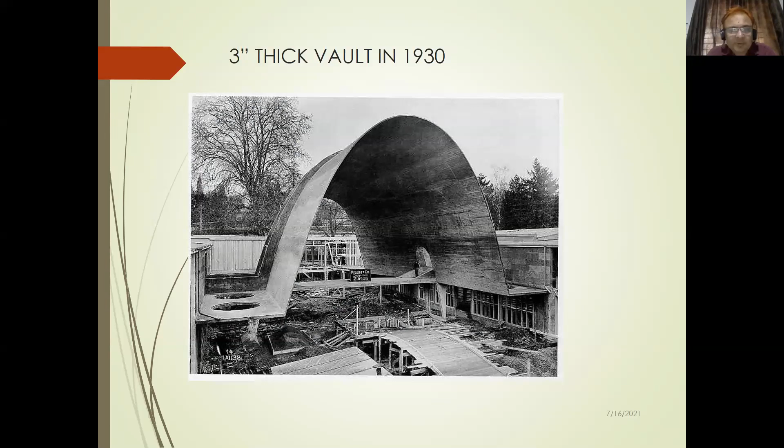Ultimately, why are structures built earlier standing intact and giving service, but recently constructed buildings showing distress? What is the reason? This big question mark should be in your mind, and then you can find the solution. See, this is a 1750 old structure, built in 1750, so we can calculate the durability. This is 1930, when concrete was initially invented. So many people were very careful about concreting. It's a new material, so they were much caring about quality, and small points were taken care of. With this particular small point, they built a 3-inch thick vault, and it is still intact.

These are good construction examples. This is also a good example of RCC. And now this is the condition of the apartment at Godol Road, you can see. Ultimately, the durability of the structure should vary. If you build a temple, it should last more than 800 to 1000 years, even 100 years, 1000 year, 600, 700, 800, 900. We can see intact temples in south India, very precious in our country.

Yes, as per Vastu Shastra, the temple should be let's say 800 to 1200 years old, and it should be intact. If there is a hospital, it should last 150, 200 years. Spacious structures like dams, bridges should be 250 years, 150 years. Residential buildings should be minimum 80 to 100 years. Durability should be there; it should give service up to 80 to 100 years minimum.

We can see structures in our core cities of Ahmedabad or Surat or any city which are more than 100 years old, still functioning, with people using and occupying them. Recently we inaugurated a bridge adjacent to the Golden Bridge, and we are now going to retire the Golden Bridge. The Golden Bridge was constructed in 1881. It completed 100 years in 1981.

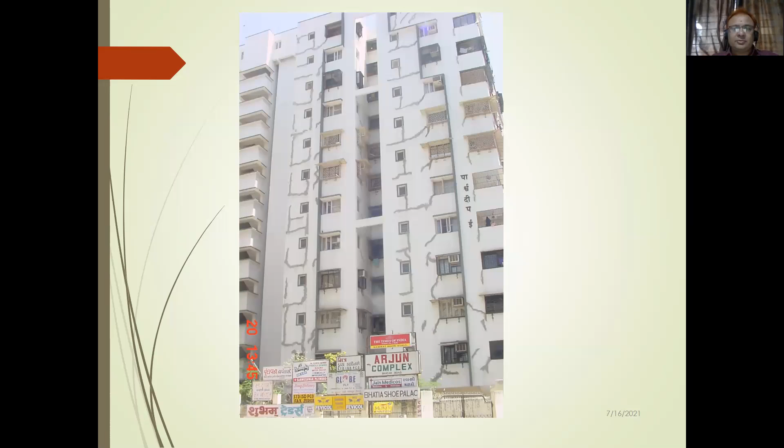I think most of us are technical persons and civil engineers, so there is no need to explain the figures or photographs. The culprit here is the rainwater pipe. In most buildings, the rainwater pipe is near the corner column, because this is the terrace and the rainwater pipe runs in the corner, adjacent to that particular column. If there is damage or any leakage from the joints of this rainwater pipe, this column may be affected and corrosion will start and progress.

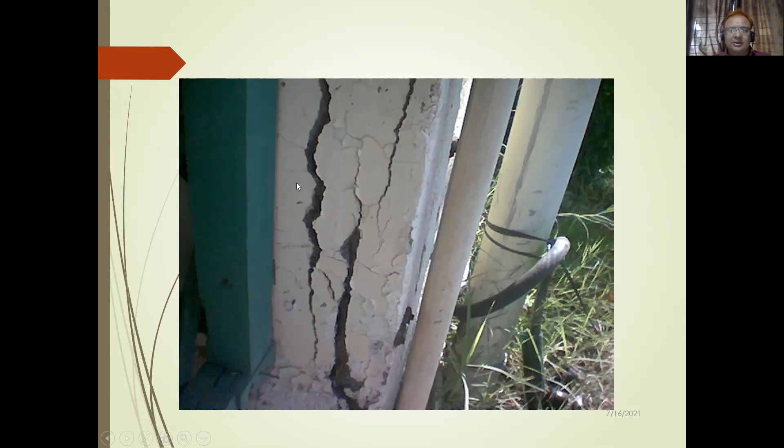There is dampness visible from the exterior wall, and we will discuss the reasons for this whole scenario. This is also a corner where the column covering is gone. Not only plaster, but reinforcement is exposed here on the terrace floor slab.

When water accumulates and stagnates on the terrace, it seeps through the slab and corrodes the reinforcement. When reinforcement corrodes, its volume increases up to 6 times, and then the cover concrete of the slab and the plaster both delaminate from it, and it becomes harmful.

In our PWD Awas near Bahumari, a slab fell in a dining hall and there was one fatality.

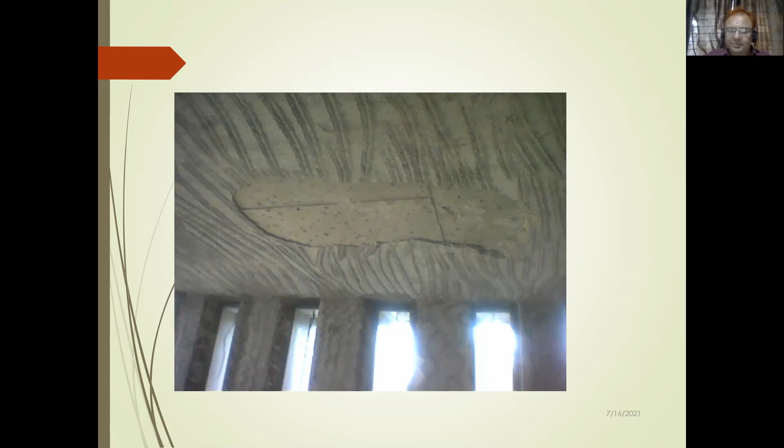Instead, just use a plastic sheet, and then remove the plastic sheet after removing the formwork, and it will be easy for plastering afterward. This is what I wanted to say.

Corroding of steel, then cover, and then plaster. This steel, this cover portion of the slab, and this is the plaster.

So step by step, I will discuss how we build our buildings, covering every aspect from the foundation, every area and every stage of the structure, and the care that should be taken to erect a durable structure.

First, we start with excavation and setting out of the building. The necessity of site visit and soil exploration is very important, because geotech engineering is, in my point of view, a more neglected area nowadays.

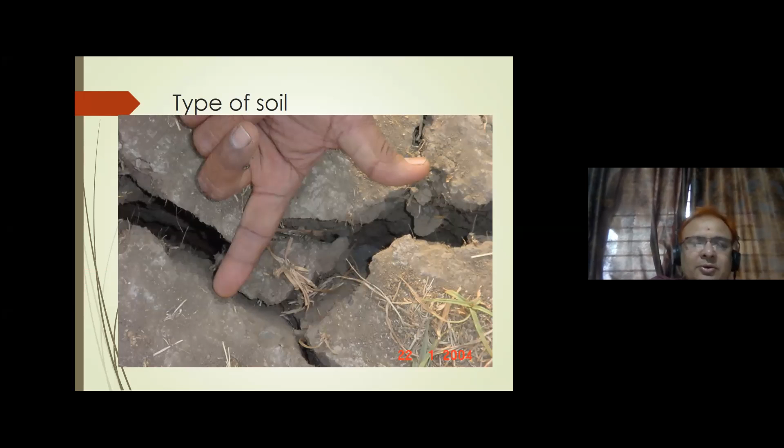We have to check the type of soil, which type of soil is there nearby your site or at your site, whether it is black cotton soil or yellow soil. And you have to take care of the subsoil water table also. Because if there is no monsoon, the subsoil water table will obviously be low. But when the rainwater comes, the water table will be up.

When you are going for the site visit or you want to buy the plot, check it out. The plot should be at an upper level from the road. The highest level of the plot should be higher than the road. That is preferable. But the plot which is 1, 2 or 3 meters below the existing road, what to do? The person who wants to sell the plot refills the soil on the plot so the level is higher than the existing road.

And if you are not aware and you start excavating or you design the foundation or that particular footing, you will be in trouble because there is refilled soil. So first of all, check on your site whether the soil is natural or refilled.

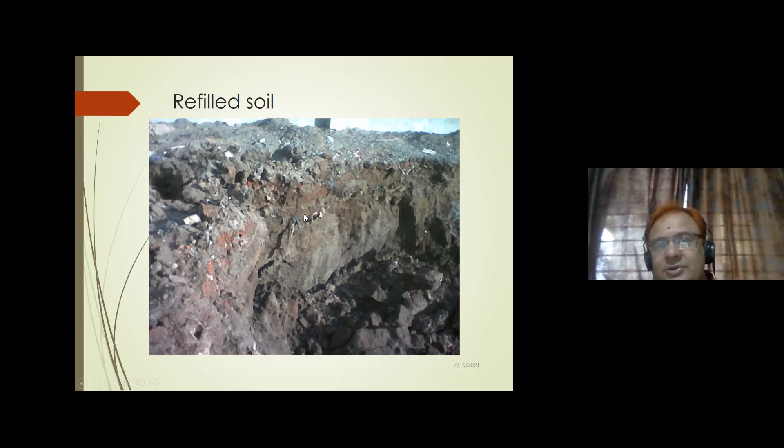Local poor pockets may be there during your excavation of the pit. The scenario is that you don't know what a local poor pocket is, but you have to take care about the adjacent properties and uses of the people in nearby premises. I am giving the pictures also.

Can anyone answer? Anything wrong in this picture? Can anyone answer? Anything wrong in this picture? Because the interaction can boost my energy to deliver the lecture and tell me at what wavelength I have to deliver.

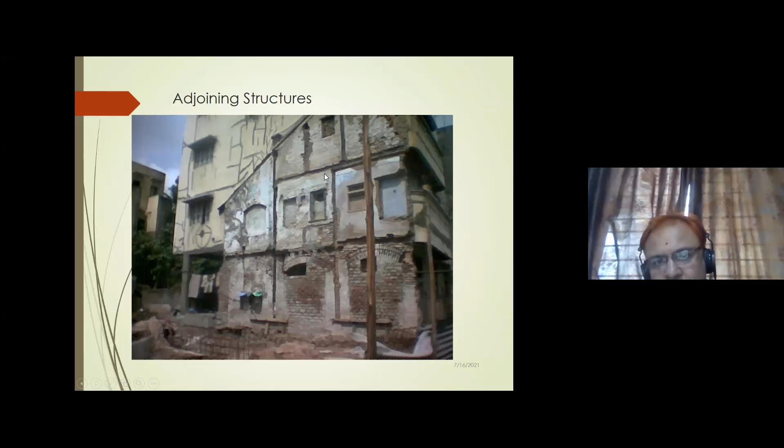So here is the excavation for a footing trench. Storing this particular soil near the footing is a wrong practice. You have to throw away this particular soil so it cannot go back into your trench, and fatal accidents will be prevented. So this is wrong. If there is rain, this soil nearby will fill your excavated trench again.

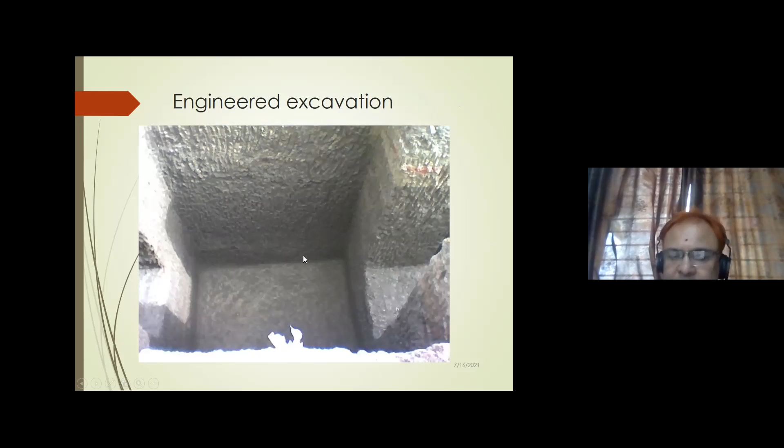This is also permanent. But if you are going for such type of arrangement, take care this concreting should be intact enough. Otherwise, it will move horizontally or vertically. Then your center line or marking will be disturbed, and your column, trench and footing center will be gone. So you have to take care every time. When you come to the site the next day, check the center line and then start the work.

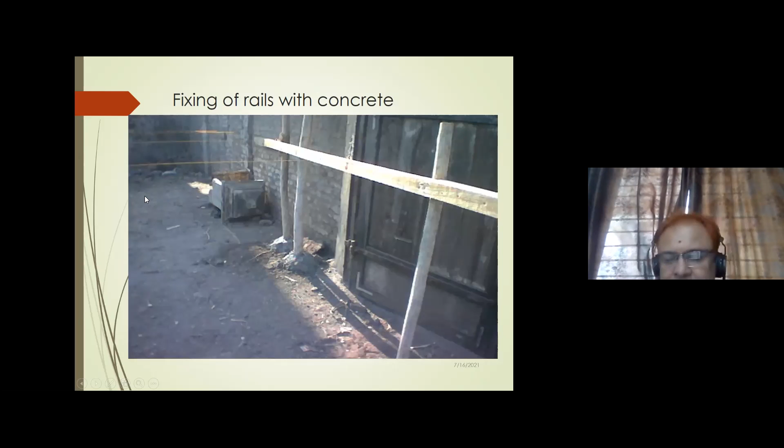Here it is. In so many cases I found that it is on this wall, that is fine. But if we are making an arrangement like this, it may be disturbed by someone or some animals. So we are victims of this center line being disturbed.

Don't excavate the entire area. If you go one by one footing, it will be good because you find the consolidated soil near this footing, and if you are going for a masonry structure, you know the soft story effect will be here in this particular entire area we are excavating. If there is a basement, that is fine, but we are refilling this soil, so don't go for the whole entire area excavated by the JCB. Just one by one, take the trenches, excavate the pits, and fill again.

This type of support, what I say, you have to support horizontally when you're excavating any structure in a Gamtal area or in a city area. Otherwise, the nearby adjacent property may tilt.

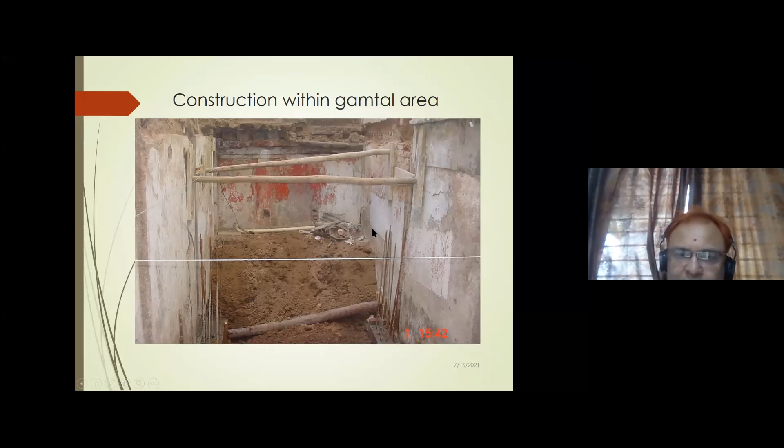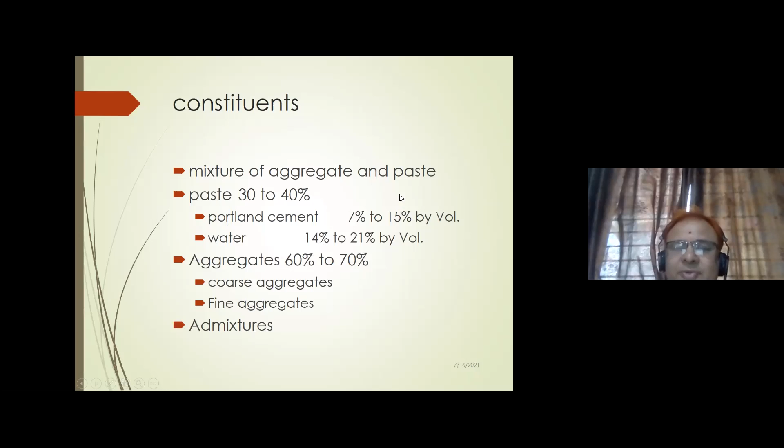Then we know that the material should be of good quality, but up to which extent are we taking care? Basically, concrete is a man-made stone. What we know is cement, sand, coarse aggregate, and then ultimately concrete is there. This is the ideal mixture of aggregate and paste. Paste should be 30 to 40%. Portland cement 7 to 15% by volume. Water should be 14 to 21%. The filler material, aggregate, 60 to 70%, coarse and fine, and then admixture. This is the ideal of concrete.

We all know that. Then, sorry. Cement should be a dry powder of very fine particles, these are the ideal points. It forms a paste when mixed with water, the chemical reaction hydration happens, ultimately glue is there, then the paste coats all the aggregate together by this glue. It hardens and forms a solid mass after setting. This is the ideal scenario.

Water is needed for two purposes, chemical reaction and workability. Only 1/3 of the water is needed for the chemical reaction. Then the remaining water remains as pores and holes. So for workability we can concentrate on this area, reduce the water and increase the workability, and then the extra water remaining as pores and holes can be minimized.

Excess water, if we are going for more water than the design, is good for preventing plastic shrinkage cracking and for workability, but bad for permeability, strength and durability. We are not getting enough strength if water is excess.

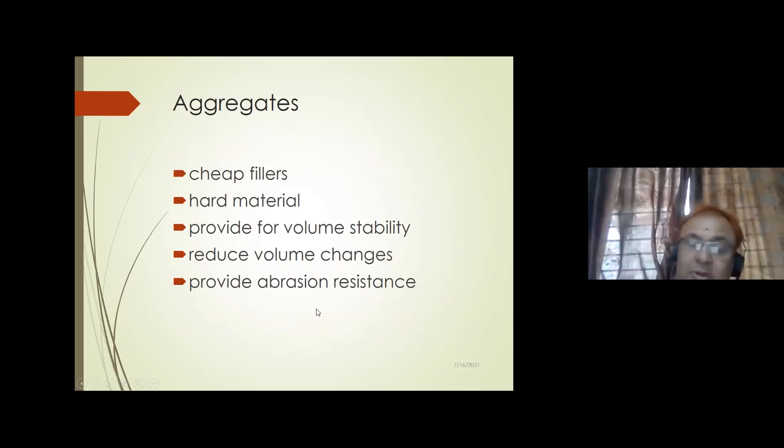Aggregate is the cheap filler, a hard material, providing volume stability, reducing volume changes and providing abrasion resistance in the case of pavements and roads or godown flooring also.

Okay, now the cement. 1, 2, 3, 4, 5, 6, 7, 8, 9, and 10. Don't stack cement more than 10 bags high in the godown. Otherwise, the bottom cement is under pressure, and within a few days it will set.

When we are using the cement, check company, grade, date of manufacture, field test, weight, and fineness. This is very important. If someone says that your cement is not in good condition, or this is duplicate cement, or a collapse happened due to your negligence with the cement, you can mail the cement company with the grade, date of manufacture and field test, and that cement company will provide you a certificate of what they tested in their lab for your batch of cement.

You can give the batch number at your site. Yes, sir. Dear sir, this is the cement I purchased from so and so shop, and this is the batch number of the cement.

There are some problems with the site, and we want to know the exact scenario of your cement test. So they will send you a test of your cement, a fineness test, and you can say soundness test. All the results they have, they can send us, and then we can give it as a proof to the client in an arbitration. Then you can know the cement is good enough.

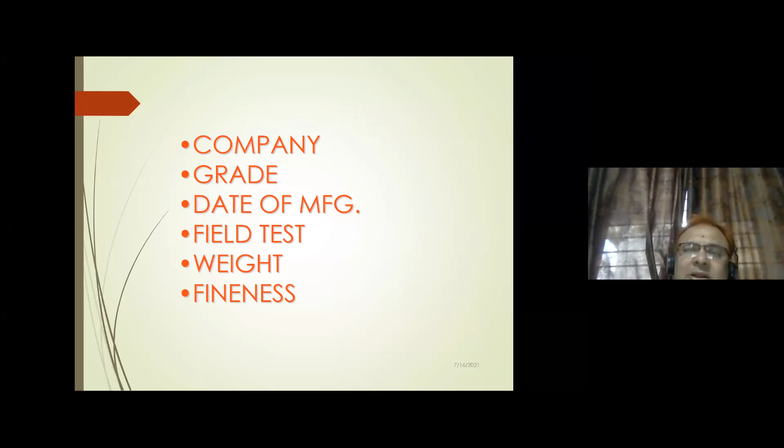Otherwise, anyone can say that you are using a duplicate cement, or the cement is old cement. So you can give a date of manufacturing and give a result of the cement. You can ask any cement company by mail, and they can send you a result.

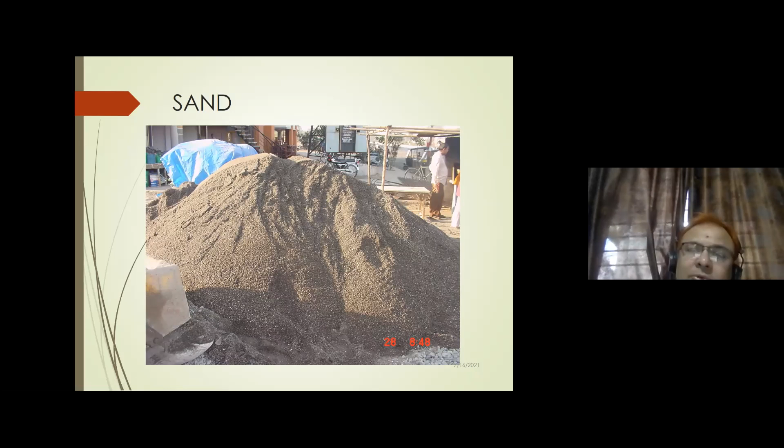Sand. During monsoon we have to take care about the sand. This is the sand with other unwanted stuff in it. Because during monsoon, what happens? The stream of the river is fast. So the person who is accumulating the sand is not able to fix their pump at the center of the river. So what they do is come to the bank of the river, and whatever sand with the unnecessary stuff, they will fill in the truck and supply to you at your site.

The mud also will come with your sand. You should be vigilant enough at your site, check the particular type of sand and tell them you have to supply sand which is in a storage place, because they store the sand also before monsoon. And don't use such type of sand, because the contractor will not say anything to you, because with the mud the cement content will be less. With very less cement they will make a mortar with the help of this mud. So don't use this type of sand at our site.

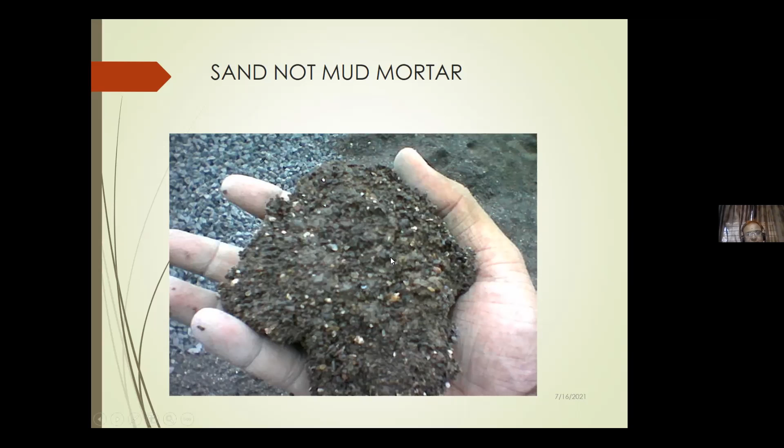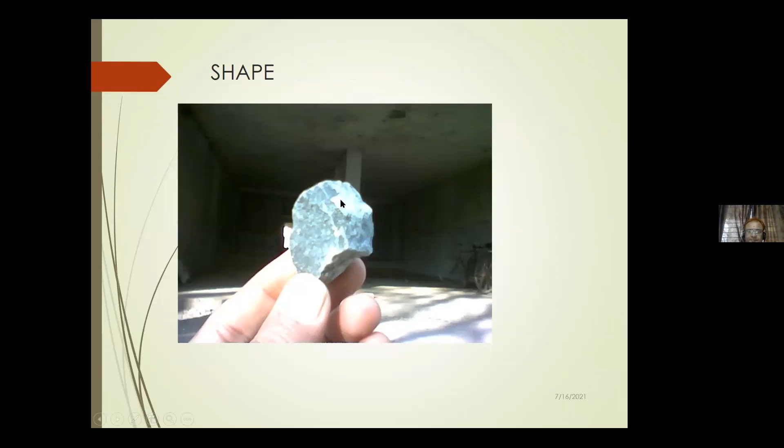This is the water cement ratio, how we check it out. If cement is more and water is less, this is one scenario. If water content is more, that scenario is different. When we increase the water content, the strength will be decreased. But we have to balance the water cement ratio and strength according to the requirement of the site and how workable concrete is needed at our site. In mass concreting there is not much workability needed. For pump concrete, we need good workability. Accordingly, we can decide and make a concrete.

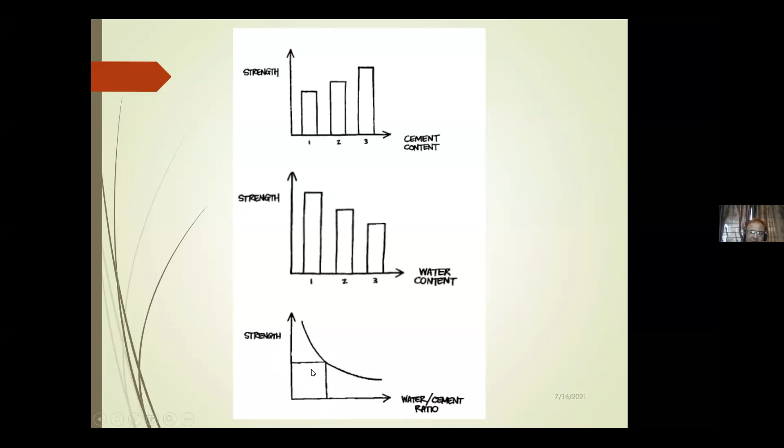But now, thermomechanically treated bar is available in the market. But how to check whether this particular bar is TMT or not? From day one through my whole journey, diploma, BE, masters in structure and PhD, all from SVNIT, I did not find a single chapter or line in any book on how to check the thermomechanically treated bar at our site. So I will show you, because we use this steel as a ductile material. If it is not proper, our building may collapse during a tremor or under lateral load.

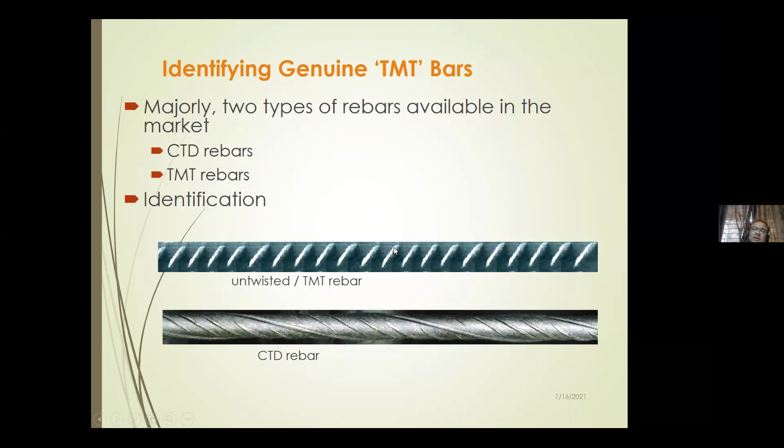Just merely relying on the word TMT, you cannot rely on TMT or thermomechanically treated, don't rely on it. It's just misapprehension to the customer and misuse by the manufacturer. They are misusing this particular word and supply any type of steel at our site. So the technical definition is what?

Must comply with a set of chemical, physical and mechanical properties of product manufactured by means of, see, again I am telling, manufactured by means of heating, they have to heat, then draw it, then quenching and tempering. These four processes should be done in a proper manner. Otherwise, we cannot produce the thermomechanically treated bar.

This heating, drawing, and tempering, these are fine. But there is a problem in the quenching. Anyone know what is quenching? Okay. I will show you what is quenching. If some video is appropriate, I want to show you what is quenching, because you are not replying, so that's why I'm putting such exercises. Quenching means when you are heating the steel and

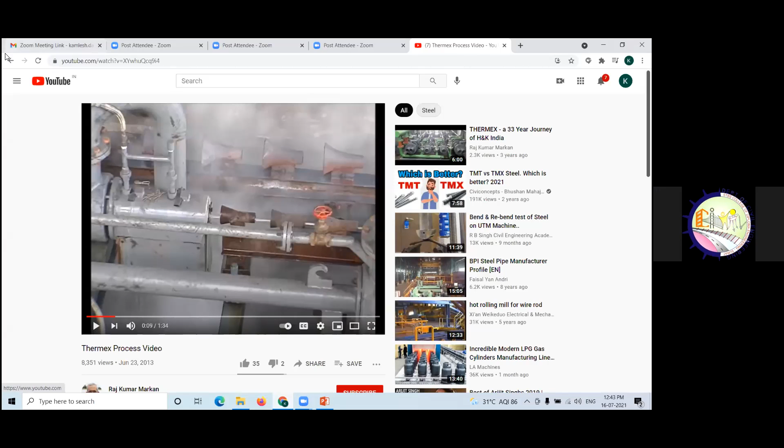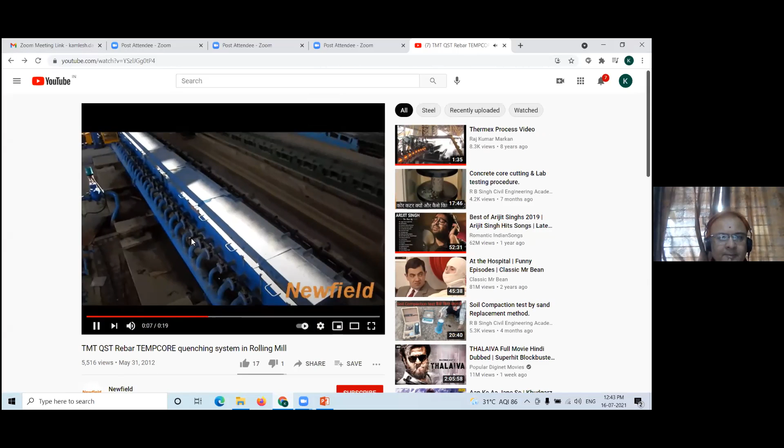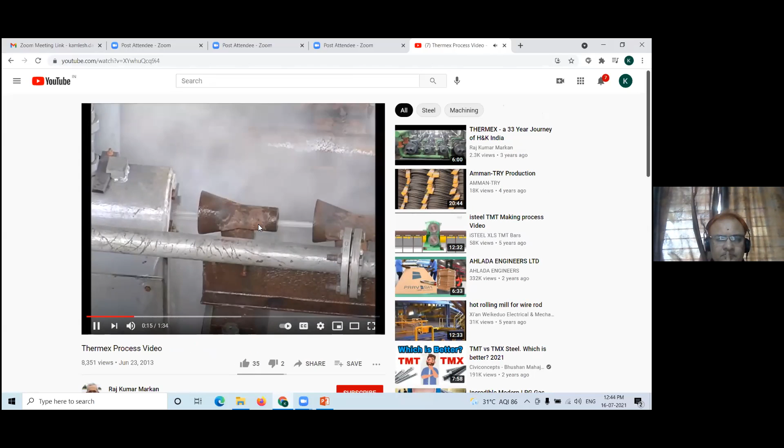This is the video I am telling about. This is the quenching box. And on the side you will see water falling. This is the water they are sprinkling on this particular hot bar. See the water. This you can see here.

I think now you are able to see the video, no? Yes. Hello. Yes. Okay.

Okay. This is the process of quenching. Ultimately, they heat the bar.

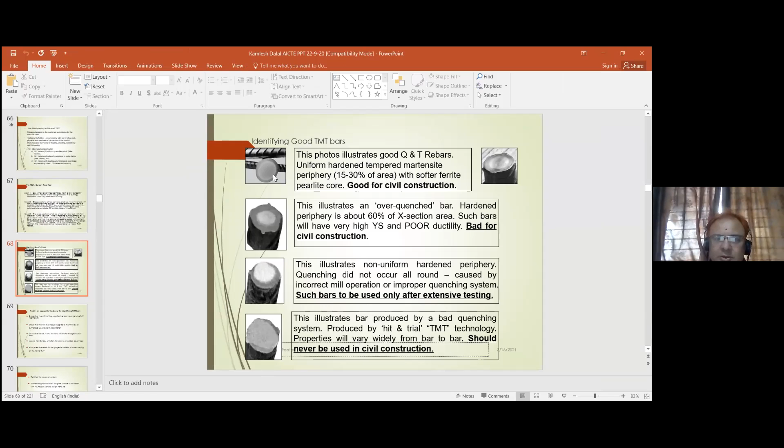Okay. So what is the actual process? So many engineers don't know the actual process of TMT bar. This is the cross section of the bar. As per our video, you can see the uniform hardened tempered martensite periphery. It should be 15 to 30% of the area, and in between, the softer ferrite-pearlite core; it is good for civil construction.

If bar benders are bending stirrups, it will crack because this type of over-quenched bar has a more hardened periphery and less soft core. So it will crack, and we cannot get enough ductility in such wrongly quenched bar. So these are the exact scenarios of quenching and thermomechanically treated bar. This is a perfectly treated bar.

This is over-quenched. This illustrates a non-uniform hardened periphery; quenching did not occur all around. Some manufacturers are not going for quenching. As we see in the video, they just dip the bar in the water tank and remove it. So a perfect TMT bar will not be manufactured in that company. These will be harmful for our site.

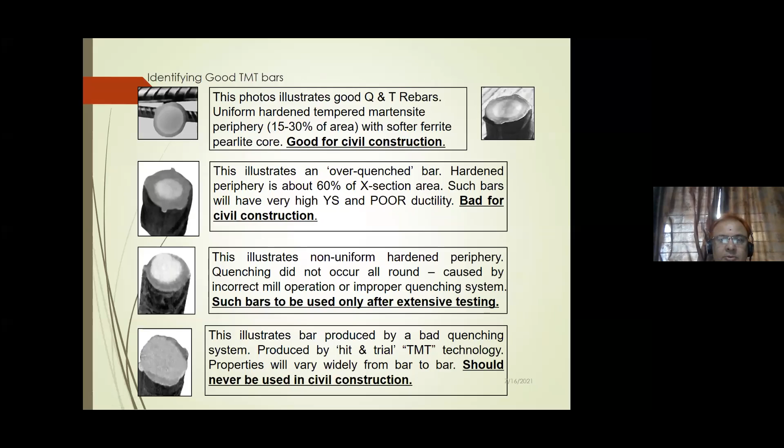This is the exact 15 to 30% martensite area, and the rest is the soft core. So how to know that this is perfect TMT or not? This is very important. So we are going for the cursory test. Just a moment, I am not able to change this slide. This is a cursory field test. We randomly cut a small length of test sample from what the supplier actually gives us at the site, from a few randomly selected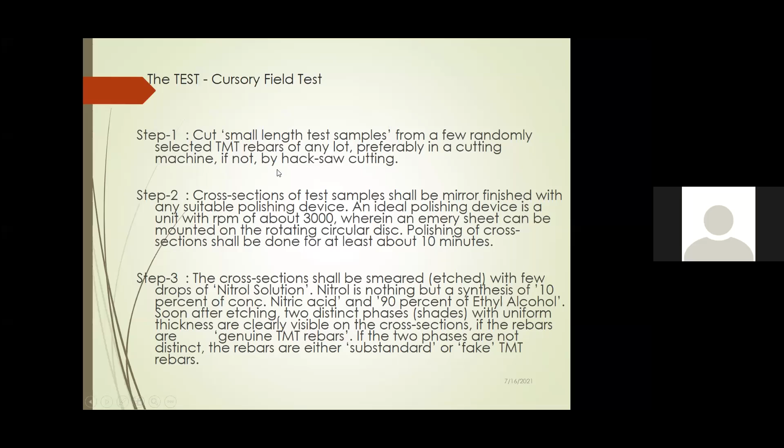Hello, sir. Sir, you are not audible. Hello. Sir, am I audible? Hello. Yes, madam. Kamlesh, sir. Sir, are you getting my voice or not? Hello, sir, you are not audible.

Hello? Yes, sir. Hello. Yes, sir. Due to some error, I am not able to... Can you see my screen? No, sir, it's not visible. Okay, I will share again. Yes, now it's visible, sir. Okay, due to some connection problem, it may be there. No problem, sir. Please continue.

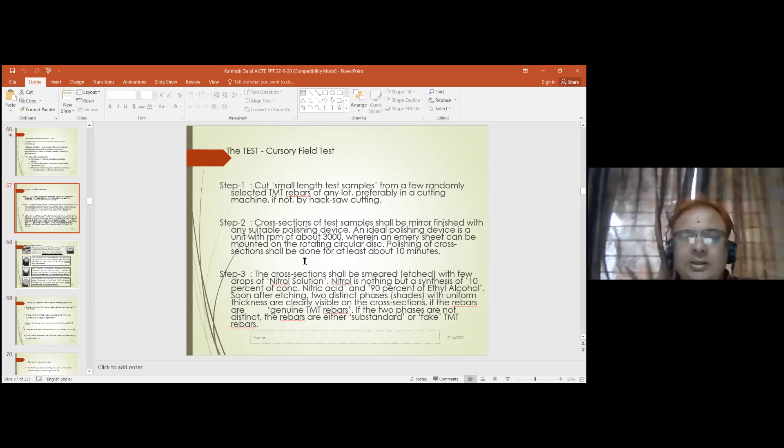So, we have to go for the procedure actually. I think we start the procedure again. Cut the small length of test sample from the randomly selected bar. Then with 3000 RPM, we have to polish with the emery, and then the main point, the cross section shall be smeared or etched with a few drops of nital. Nital means what? It is nothing but the synthesis of 10% of concentrated nitric acid and 90% of ethyl alcohol.

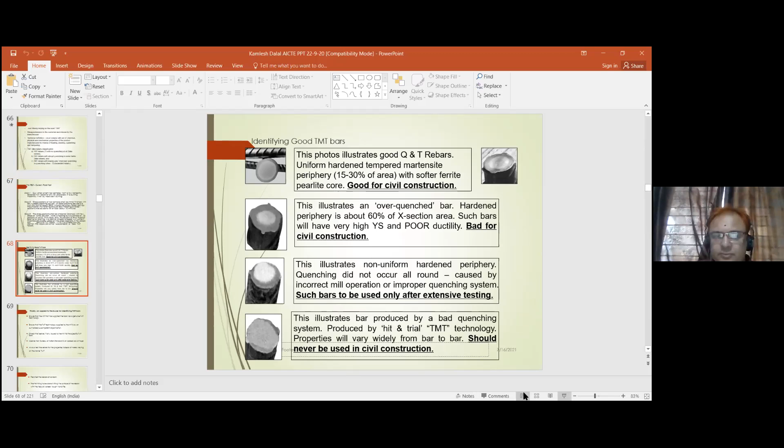Because nowadays very good standard companies are there, but we have to check it out randomly, so we are assured about this bar. We check the sand, then coarse aggregate, then cement, and this bar also. Okay, this is the cursory test what we discussed. I am not taking much time.

Now, the construction equipment. These are also playing a very important role. These are the volume-based mixing. You all know that as civil engineers. The weight batch mixer machines are more precise and more preferable, but in 60 to 70% of our construction industry, such practice is going on till date. These are mixer machines.

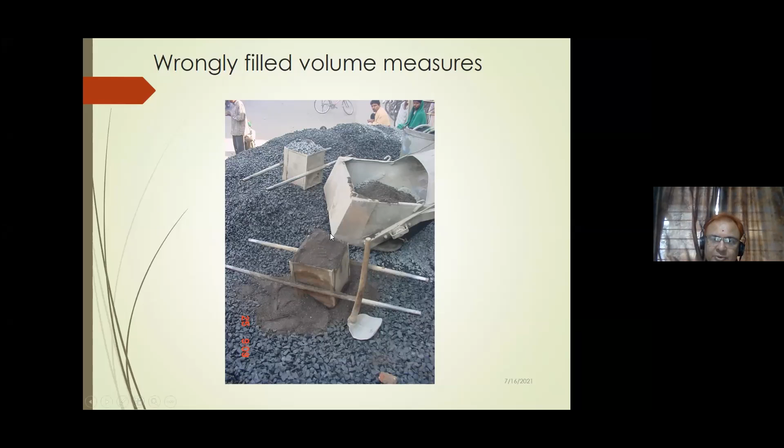And now, wrongly filled volume measures. You can see one bag cement's volume is here by this line, and these are the excess coarse aggregate and excess fine aggregate. So cement content will be less when you are using such type of practice. See, we have to take care if we are teachers or professors. What I suggest to all, the future of the civil industry should not be like this. We have to train and educate our students. This practice should be eliminated from the site.

And by volume, they are using this type of gamela also. Some are using big and some using small gamela. If this is a small gamela, one bag of cement will cover four gamelas. Per bag of cement, four numbers of gamela. But when you are measuring cement, this gamela is there; when you are measuring aggregate, this one will be there. So the cement content is again less, our concrete will suffer, and our ultimate structure will be less durable.

Sometimes on the site, due to congestion of the steel in a junction of column, beam, and cantilever beam, there is extra steel in the cantilever area. We know that when designing the structure, there is an extra bar on the cantilever side on top. Then bent up bars from the beam will also go on top of the column, and the existing vertical column bars are also in that particular junction. So these junctions are very congested with steel, and with 0.4, 0.3 or 0.35 water cement ratio concrete, it is not possible to cast the concrete in that particular junction.

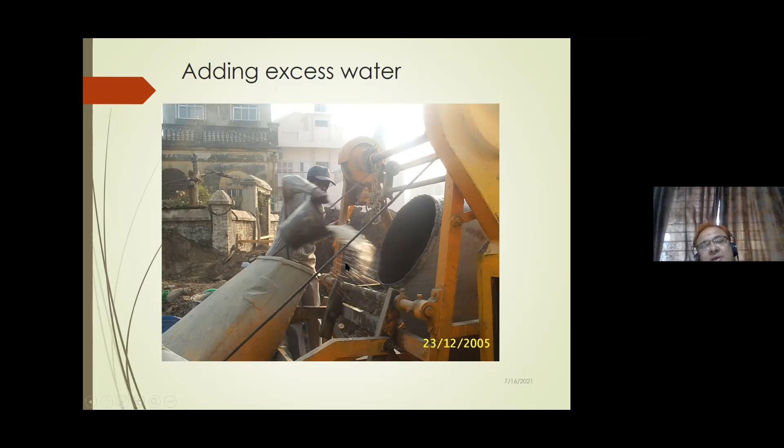So the person who is casting the slab makes a whistle, and this whistle is heard by the waterman, and he gives this type of sign for the water. He will add excess water on the site, and our mix design of 0.35 or 0.45 will go to 0.5, 0.6, and 0.7 water cement ratio by this gesture. So our concrete will be gone and our mix design will be vanished.

Then what I said, use the modern concrete mixer machine. This will be advisable on every site, but it is not always possible. So we have to take care of what we told about all the materials, and the volume-based mixtures should be taken care of, filled level with the surface only.

When we are using vibrator, go in quickly, out slowly. Then count 1, 2, 3, 4, 5, such type of practice will be there, but the poker must be long enough to go into the bottom layer.

Never touch the poker with the formwork. The formwork should not be touched.

And never touch the reinforcement, because when we cast this 10-meter slab, the reinforcement in the slab will set within 30 minutes as per our cement setting time. If we touch the reinforcement while vibrating, the bonding between the concrete and the reinforcement will be lost.

So don't touch the formwork and don't touch the reinforcement, and never spread the concrete with the poker on the reinforcement, as it may collapse the formwork.

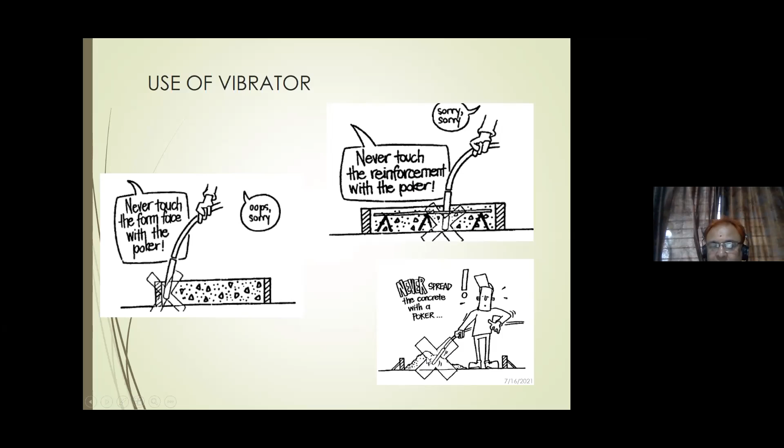And for footing, when we construct a footing, go for dewatering, don't skip it. Otherwise what they do is pour dry concrete in the footing while water is already available in the footing. Don't skip dewatering before pouring the concrete.

And provide a proper cover as per the IS code. Minimum 50 mm cover should be available in a footing. So provide a proper cover in the footing, otherwise it will corrode the reinforcement.

This is the slope of a footing, this is also a good quality. Don't use plastic bags behind the footing.

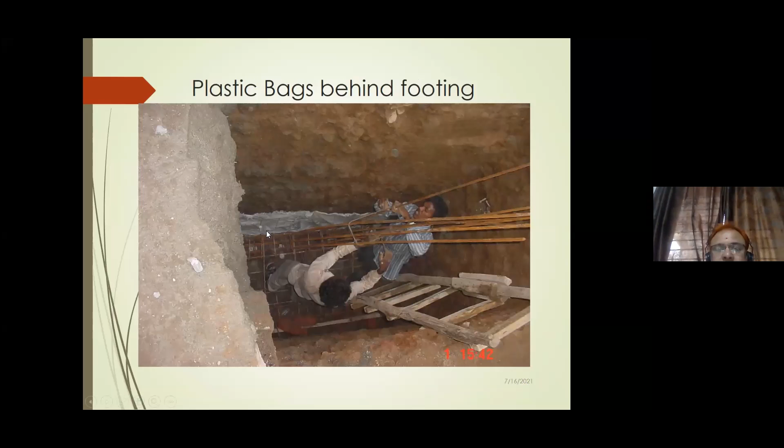Clean the reinforcement before casting the column. This should not be avoided.

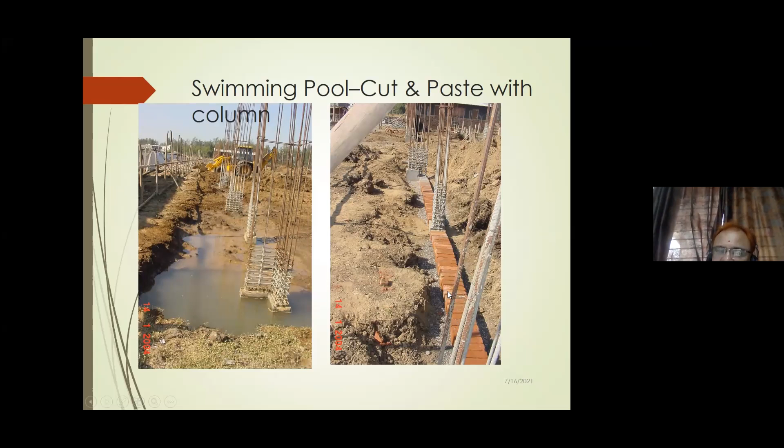In a ground beam, you can see the condition of ground beams. You are at the site, now your mind will be stuck in this situation. They have to pour PCC, plain cement concrete, and compact the soil, have the PCC there, and then cast the particular ground beam. Otherwise this scenario may happen.

The construction joint should be there with a stopper, otherwise it will be harmful, and it should be near the point of contraflexure. Don't use a joint at a junction, or provide a joint at the center of the beam, because at the center the bending moment is maximum and shear force is minimum. We have to provide a joint near the L/4 area, near the point of contraflexure.

You feel that the person can clean this mud in a proper manner, then cast. That is our responsibility, we have to take care and remove this soil properly, and then cast the column.

And for the plinth beam also, you have to provide stirrups on the column bar and then cast the beam. Otherwise it will be dislocated.

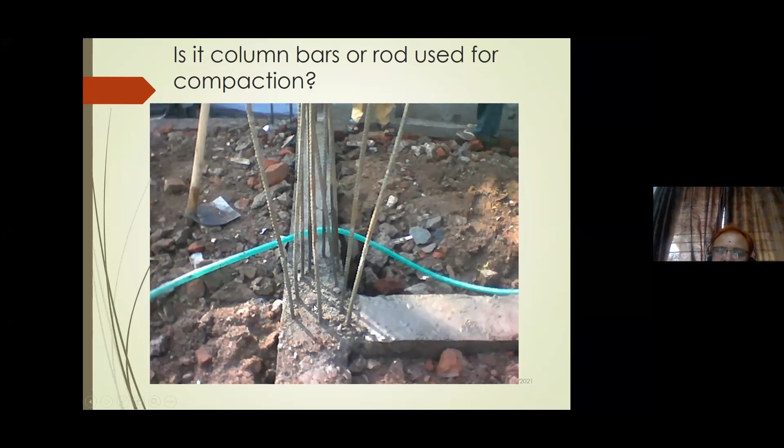This cover also is gone. Here is the maximum cover, and here the cover tends to 0, but not 0.

Don't provide brick, because you cannot remove the brick after casting and it becomes part of your concrete. The brick is not a part of the concrete in any code, in any country's code.

These also don't provide stirrup. You just have to provide stirrup and then cast a column or beam.

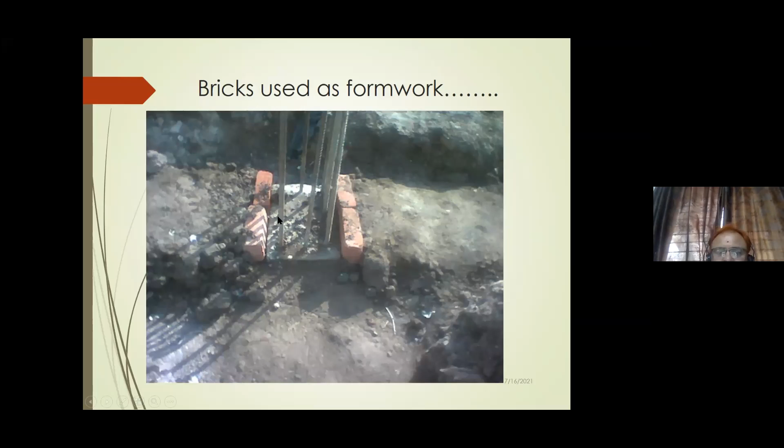Don't dismantle. You have to go for rebar. Don't use plastic.

I think you are available, you know the starter. I think because you are not a single person responding, I am not able to understand at which wavelength I have to discuss with you. If someone responds, then I can focus on such points. But I think you are in a very relaxed mood, so you are not answering me.

But you know the starter, I'm going to show you a starter. This is the starter. To define or complete the particular center line of the formwork, we are providing a starter initially for the column at most sites.

See, the column is here, and the starter is here, and the covering is here. These are also going.

But I want to convey one thing. When you are using a starter, if the design of this beam and column is M35, when we cast this starter, is it M35 or not? Because at the end of the day, the contractor gives an instruction to the labor to provide 4-5 starters, and the labor gives the instruction to his wife, and his wife haphazardly makes the concrete, and it becomes M12 or M15 or M20, whatever the concrete, I don't know, but this concrete is not as strong as that particular M35 concrete.

And if this concrete is less than M35, say M20 or M15, at all floors this starter becomes the weak link of the chain, and during a tremor, the building collapses from this junction.

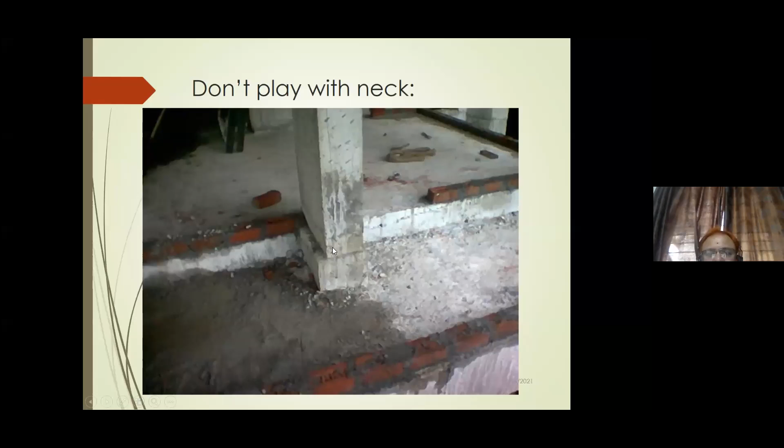You can see the scenario. What is the center line? What is the axial load? They don't know. This also we can say. Here is the center line, and this center line passes through here. The load path is here, you can see. And this is very poor concrete here.

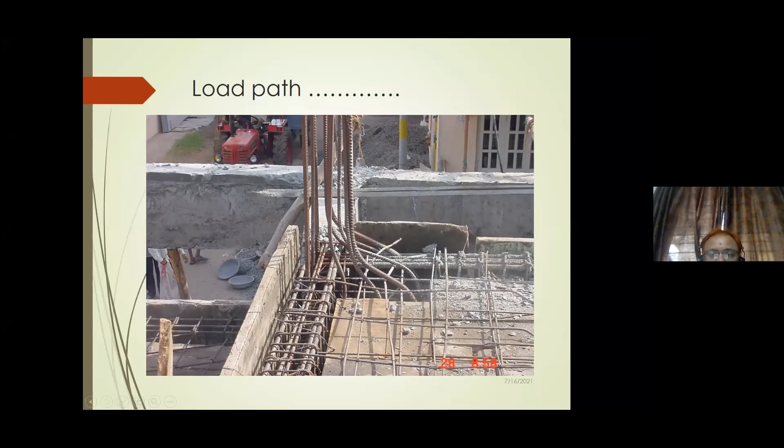Otherwise, it will fail, and that joint will be gone. So bend this bar like this. This is the wrong practice. They forgot at which phase they have to provide the column. They are providing reinforcement bar here, and then they dismantle the column and bend it. After casting, anyone cannot know the actual scenario of the wrong practice.

Don't use it unplumbed, it should be plumb. Don't use this type of strut on a slab, otherwise it will slip and all this formwork will be dismantled. This type of scaffolding should be advisable. And this type of formwork also should be avoided, because cement slurry will come out of poor formwork and our slab will be weak.

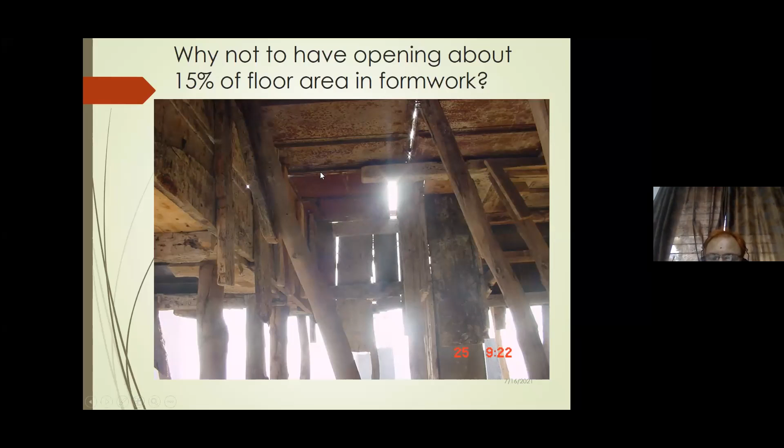We know that the initial setting time of cement is 30 minutes, but during plastering and concreting, the labor is not much serious about that initial and final setting time of cement. So when 1 p.m. comes, they stop the work, and this mortar remains as it is for more than 1 hour, and the initial setting time is gone.

Lunch time is going on and this mortar is left as it is. They are not bothered to complete this mortar. When 1 p.m. comes, their time is up and they stop it. This will be used again after more than 1 hour, and they pour water and use it again. After spending enough money, the cement content is also good in this gamela, you can see that, but it will be meaningless.

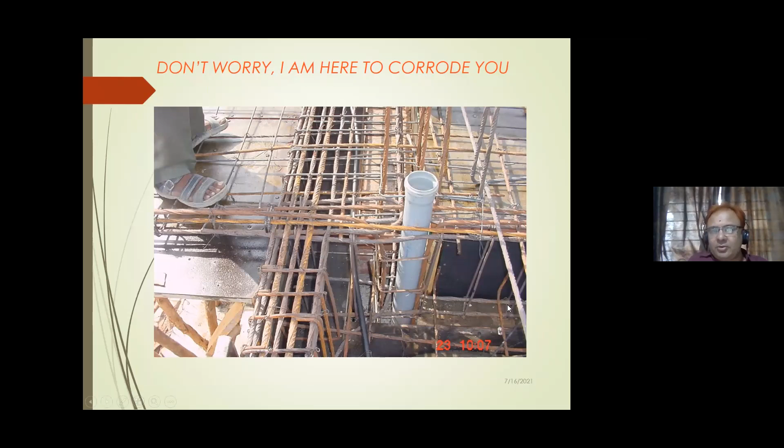This is the most neglected area in the building: plumbing and drainage services. How they neglect it, you can see. They cut the beam, they cut the beam, see, they cut the beam. This rainwater pipe also goes through. When it is leaking, all RCC members will be affected, and ultimately the resultant damage is here.

Electric line. How can we pour the concrete in this area? How can we achieve the strength we desire from structural design or concreting? These are not placed yet, this is already fixed. We have to concrete on this slab. What is the thickness of slab? 125 mm, 150 mm, it will be half of that. It covers half of that area and our slab thickness is gone. Now we can see why the slab is leaking and where it goes.

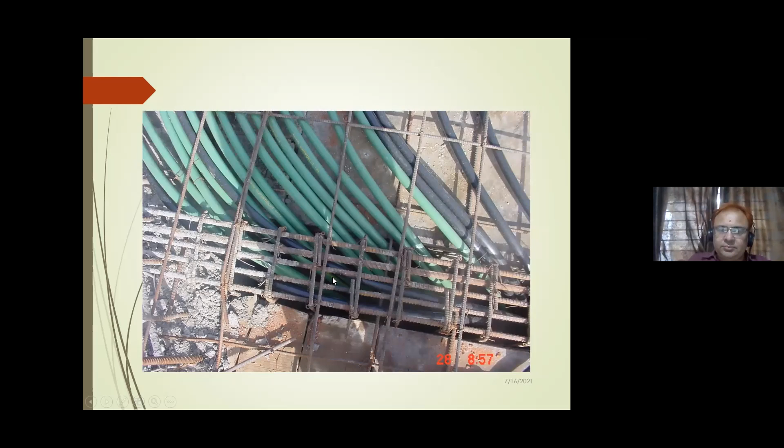See how you can pour the concrete here. This is when your parapet is here, if they don't seal this end of the pipe, water will enter the pipe and spread through the whole building. Don't touch the column. Don't go for this practice.

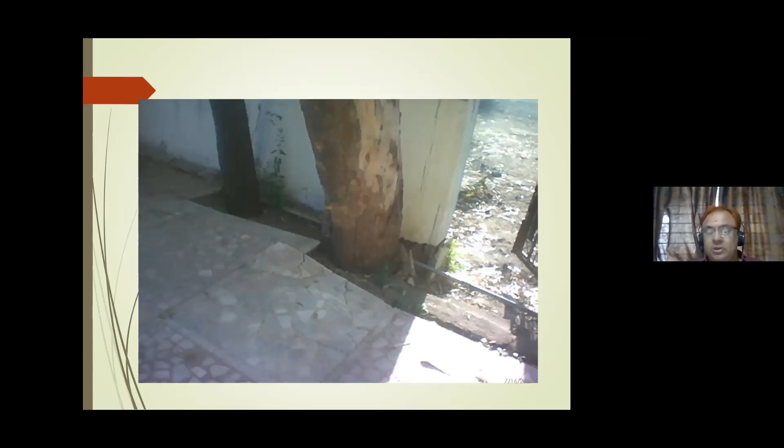In vegetation also, some people are using acid. Don't use acid, because concrete pH is 12 to 14, and when you pour acid in the concrete, the pH will be less than 7, and then reinforcement will corrode and our building will be gone. These practices should be avoided. You have to use pesticides for this type of case. Remove the vegetation as early as possible and pour pesticides instead of acid, then the problem will be resolved.

When the repair is required, where reinforcement corrosion and carbonation are present. Carbonation very much affects the exterior column, beam or any structural member. As a thumb rule, per year 1 mm of carbonation should occur in the concrete. If the cover is 20 or 25 mm, within 20 or 25 years it will be near the steel. So you have to go for protective coating of the exterior part of the concrete so we can avoid carbonation.

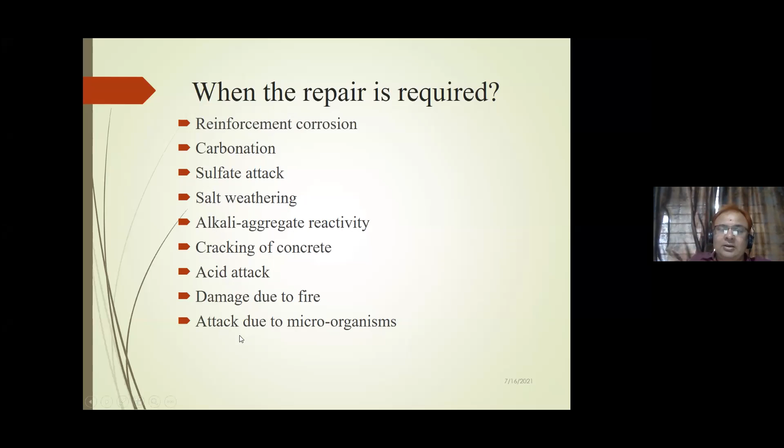Then sulfate attack, then salt weathering in seashore areas like Bombay and Dwarka and all that, then alkali aggregate reactivity, cracking of concrete, acid attack, damage due to fire, attack due to microorganisms. What they are doing is no repair, or cosmetic repair. In delamination of concrete, they are doing only plaster. Then partial repairing or total repairing, partial replacement or total replacement. This is the option.

What is the repair procedure? We have to prepare desk work. What is the estimate? How to do it? Which area should be attended first? Preliminary investigation, visual inspection and appraisals, then detailed investigation, data collection, field measurement, condition survey, then sample collection, testing of samples, analysis and evaluation. These are all the steps, and then conclusion and recommendation. Then we can start the work on site.

In a masonry structure, we can do pinning for arch ring separation, concrete fill of spandrel walls and crack injections. But in concrete structure, surface protection, as I told you, is very important, otherwise carbonation is going on, at the rate of 1 mm per year as a thumb rule. And protection of steel - if you protect the surface of concrete, obviously we are protecting the steel reinforcement.

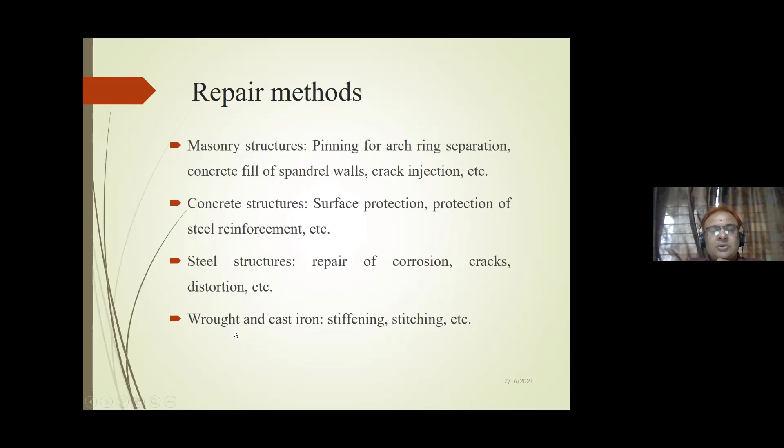Then steel structure - repair of corrosion, cracks, distortion. Every year we have to paint the steel structure and remove the corrosion. Wrought and cast iron, stiffening, stitching, etc. Then structural crack, mainly due to defective design and defective...

Hello. Hello, sir, are you able to hear me? Yes sir, yes sir.

Defective design, defective load assumptions, and incorrect assessment of bearing capacity of foundation soil and soil properties. Because, as I told you, at first glance we are not attending much to the area of foundation and geotech. The building may tilt. Defective detailing of joints and components like roof, brick wall, corner joint of wall. Then defective detailing of structure, detailing of steel reinforcement, and lack of quality control during construction. I will discuss the lack of quality control in detail. If you have questions, you can raise your finger or ask me during this presentation, so we can resolve your query at the time.

Cracks in building - structural crack. First is structural crack due to incorrect design, then faulty construction and overloading. Then non-structural cracks - moisture changes, thermal movement, and elastic deformation. Then creep also - if the load is excessive and the concrete is more than 10 or 15 years old, creep may come into picture. Then chemical reaction in an aggressive environment like industry or bank of river nearby sea. Then foundation movement and settlement of soil, and vegetation, as we saw in some pictures - it is really harmful to our structures and may cause cracking.

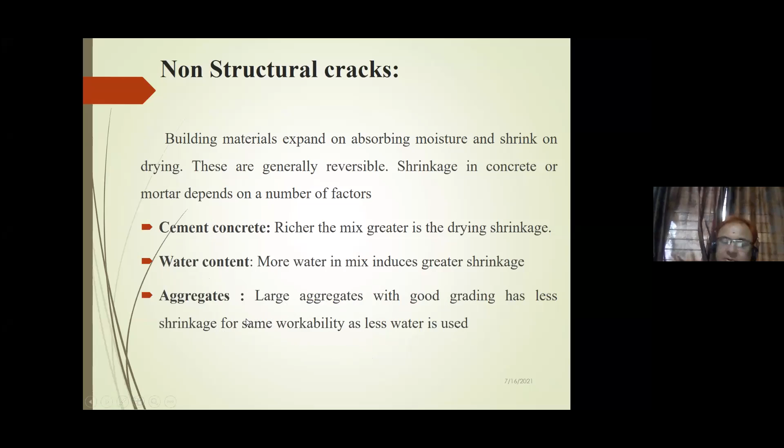Then curing - if proper curing starts as soon as the initial set has taken place and continues for 7 to 10 days, shrinkage is comparatively less. This is a very neglected area in construction. When we cast a slab today, it dries overnight, and only the next day do people come and start curing.

But after completion of concreting, you have to cover that slab with a plastic sheet, so that moisture cannot evaporate. And in vertical members, columns and chimneys, all those things, if you are not able to cure properly, apply the curing agent on that. That curing agent doesn't allow moisture to evaporate. Then the curing will be perfect and our drying shrinkage will be comparatively less.

Excessive fines. More fines in aggregate require more water for same workability and hence more shrinkage. More fine aggregate needs more cement and more water to cover that. So we have to take care of these excessive fines in the concrete also. Temperature. Concrete made in hot weather needs more water for same workability, hence the result is more shrinkage. With temperature, I told you about more wind also, so we have to take care. The wind can evaporate the water from the top surface and cracks will start.

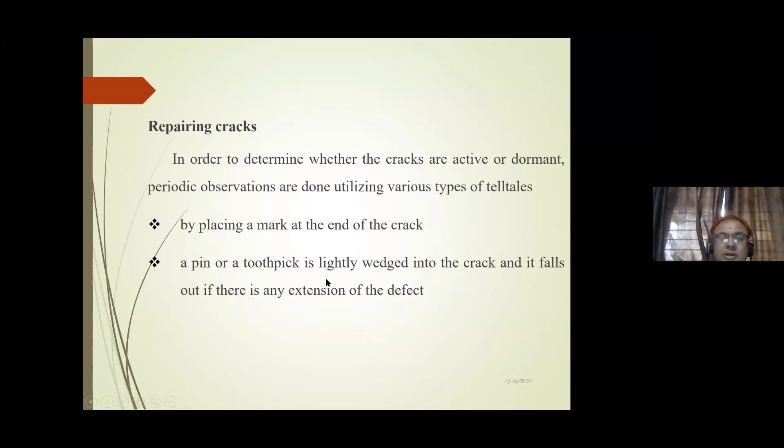In order to determine whether the cracks are active or dormant, periodic observations are done utilizing various types of telltales, by placing a mark at the end of the crack. You have to mark the end of the crack. Then a pin or toothpick is lightly wedged in the crack and falls out if there is extension of the defect. If there is a beam or slab, we have to wedge it in the crack. If it is a live crack, then that toothpick or pin will fall down, and we can know whether that crack is dormant or a live crack.

A strip of notched tape works similarly. We have to tape over that particular crack. The moment the tape tears, movement is there. Then a device using a typical vernier caliper is the most satisfactory of all. We can measure the crack by the vernier caliper and know the extent of that crack and the seriousness of the crack, whether it is live or dormant. Both extension and compression are indicated. We can use the strain gauge also. If more accurate readings are desired, an extensometer can be used. Where extreme accuracy is required, a resistance strain gauge can be glued across the crack and we can get the result.

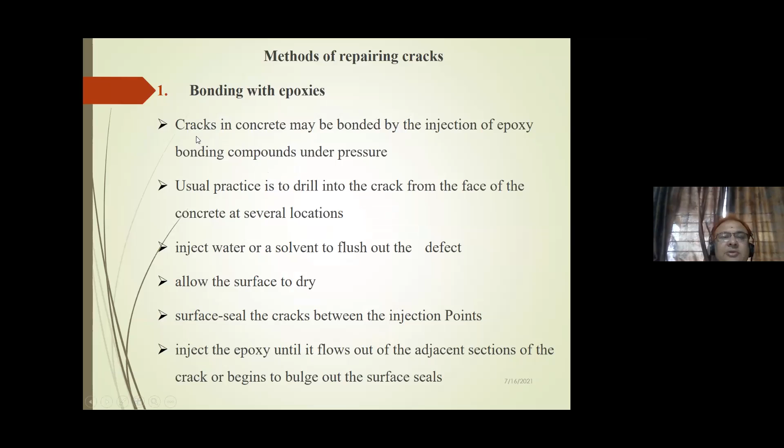Bonding with epoxies. Cracks in concrete may be bonded by epoxy injection.

The time is going so fast. Just 1 minute, it is an important point I want to cover. Okay, I think we are just taking 5 or 10 minutes more. There is no issue? Yes, sir. No issue. Please continue. If something is theoretical, then I will skip it.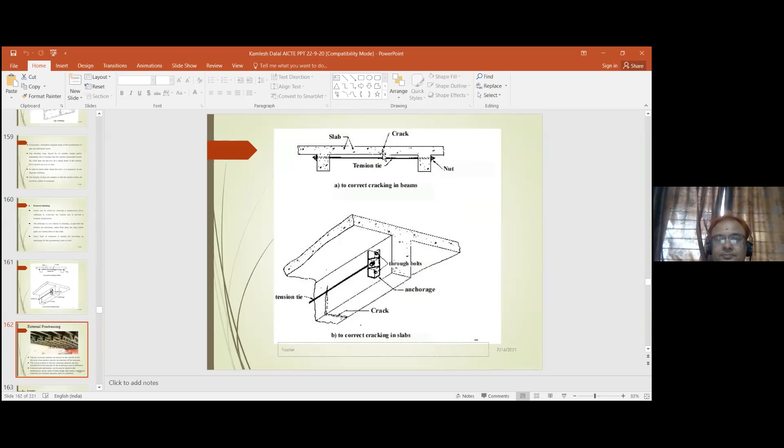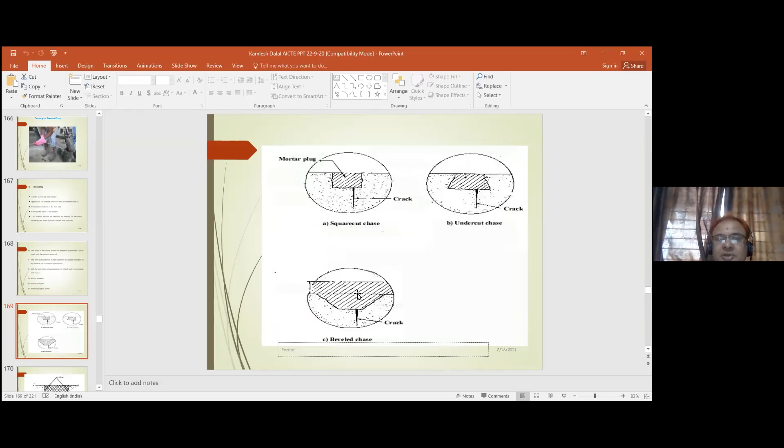And grouting is there. Grouting has power. You can see this is the dismantled or disturbed sample, then this is after grouting. We sealed it. This is the pressure pump giving 100 pounds per square inch pressure. This is mortar. This is a square cut, this is undercut, and this is the bevel chase. These three types of cut we can make, and we can put the mortar.

Use of overlays, repairing, spalling, and disintegration. This is the guideline for movement joint. RCC roof slab: 20 to 25 mm wide. Movement joint: then support RCC slab at 4 to 6 meter length, provide slip joint between slab and bearing wall. This type of joint we can see in our bridges also.

For the RCC frame structure and load bearing structure, 25 to 40 mm wide expansion joint at 30 to 45 meter interval. Why am I telling this? If the crack is there, then you can understand. If it is not provided, then crack will be there. To prevent crack, we have to provide such type of joint. In RCC frame structure, and in junction of old and new structure, provide a vertical slip joint.

In compound wall, expansion joint 5 to 8 mm wide at 5 to 8 meter. If it is not provided, the crack will be there. In concrete pavement also, 20 to 25 mm wide joint at 25 to 40 meter. In chhajja also, provide expansion joint 5 to 8 mm wide at 4 to 6 meter interval. And for RCC railing, provide expansion joint 5 to 8 mm wide at 6 to 9 meter interval. According to the temperature at that particular site, you can increase and decrease the width of that particular joint.

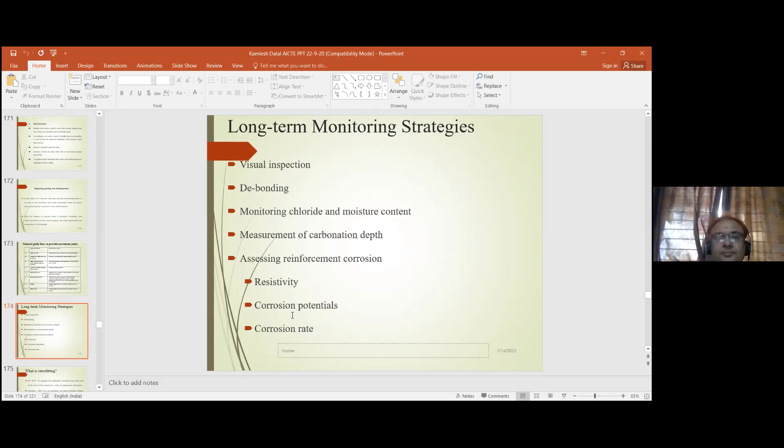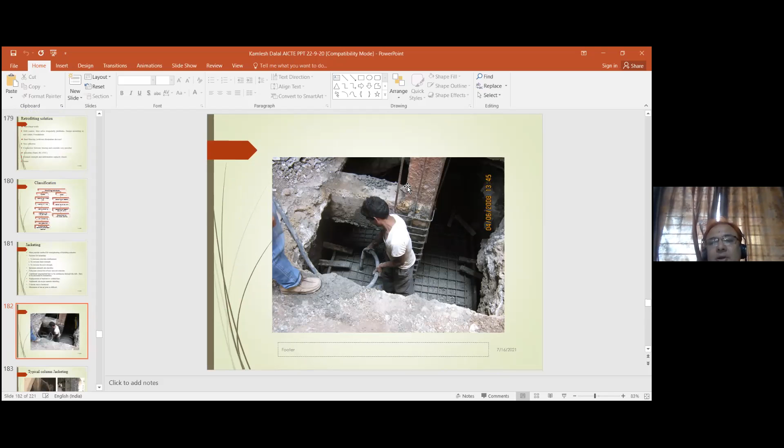This is the reinforcement, extra reinforcement, extra footing is there, and we are giving a jacket to the column. See, these are the old columns. This is the extra concreting on the column, and this is the injection grouting we did to fill the porosity in the old column. This is the steel jacketing. This is the bracket. We can provide a bracket if the cantilever deflection is more than the permissible limit.

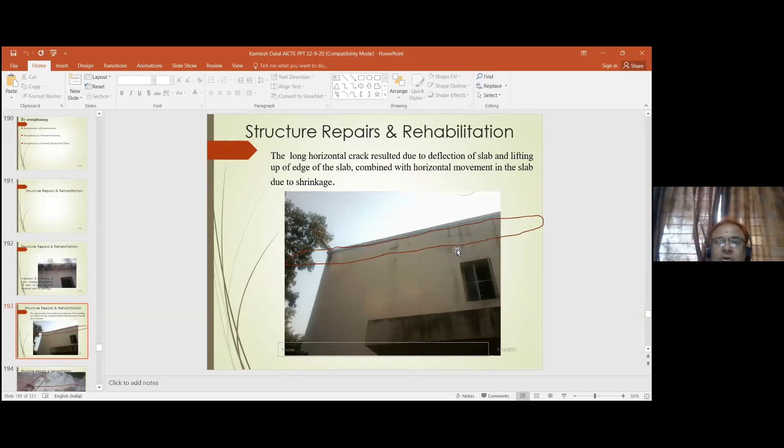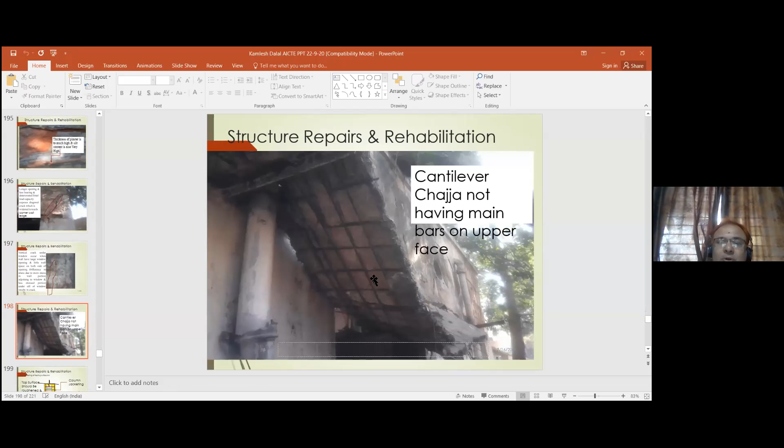So any question you can ask, because time is less, so we are not going much into the theory. If any question is there, I can give you some photographs and resolve your queries. Sir, one question. Please. Can you go for insurance of a building or structure? Yes, obviously. But it needs a stability certificate from the structural engineer. Otherwise, it is not there. Insurance companies need a stability certificate from a structural engineer, and according to the stability certificate, they will insure your building.

If there are no more questions, then I will show you some case studies within 5 or 6 minutes. Sir, another question: finally, who is responsible for failures? Owner, site engineer, design engineer, or else? Okay. These are the questions which were raised in the newspapers during one collapse in our city, Surat. Who is responsible? They blamed the Surat Municipal Corporation that they are not checking buildings, so this structure collapsed.

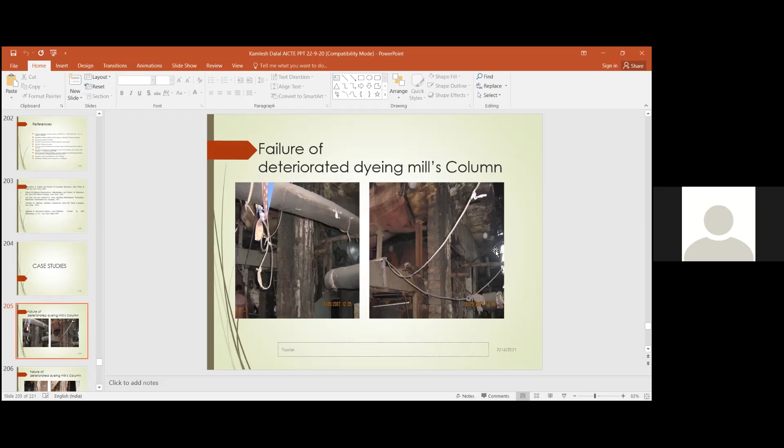Thank you, sir. Just a few minutes, I want to scroll through these photographs. These are the buildings, the dyeing mills photographs. Chemical water directly sprinkles on this column, and due to this the column is deteriorated. You can see. Chemical water is directly leaking onto this column. It is deteriorated. This is the quality of water in the drain.

And we cast it immediately. We jacketed this column; we found the old foundation in a nearby column, so we took rebar from this foundation, erected this reinforcement, and saved the structure. But negligence, you can see, no one is caring for this broken pipe, and by this broken pipe the column is corroded.

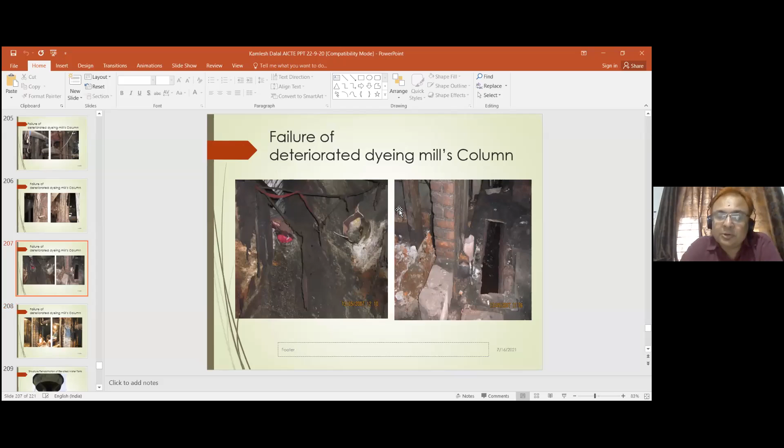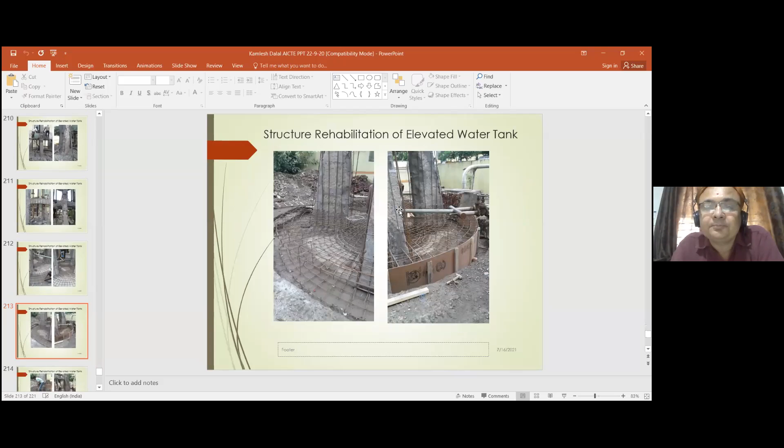This is the structure rehabilitation of the elevated water tank. You can see the photographs; not much explanation is needed. By the photographs you can see the extra foundation we provided, and the jacketing of this column. The strength of the concrete is not more than M12. That's why we did this exercise and gave support.